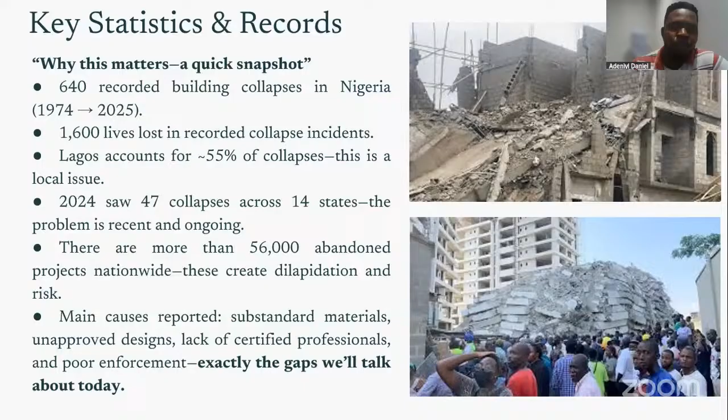What are the main causes of this report? Substandard materials, unapproved design, lack of certified professionals, and poor enforcement. And these are exactly the things that we will be looking at today, the gaps that we will be talking about today, the reasons that cause this collapse, the reasons that make buildings that have been constructed not become as functional as expected.

What is the truth about building? Structural integrity and functional design are often considered the most important factors for a building. Aside structural integrity and functional design, any other factor that is considered for a building is always secondary. First, two things to consider: structural integrity and functional design, as it ensures safe and durable, and serves the intended purpose effectively. Aesthetics, while important, is secondary, just like I have said.

The first stage is the design stage. The design phase is the phase where ideas are transferred from the client to the architect, who then brings the client's ideas to life, and then pushes the design to the structural engineer. The structural engineer does its part, pushes it to the mechanical, electrical, and plumbing engineer. They do their part, and that's the design phase basically.

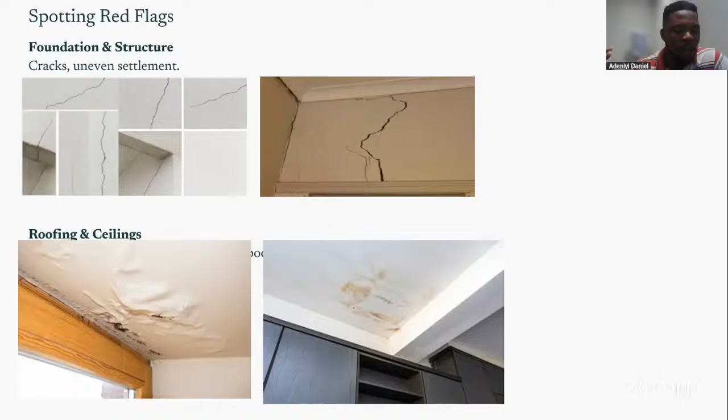You are expected to engage a proper contractor to do your roofing, so that you don't come back and start doing maintenance work for poor work that has already been done. So these are the things that cause leakage from the top, usually when works are not done well. You will spend money in the long run.

Wall finishing: dampness, bulging, and poor plastering. I've already spoken about the effect of poor plastering. But yeah, dampness as well. This is another thing that is seen in a lot of Nigerian homes. Even medically, it has been proven that damp walls affect our health. It causes degradation in our health, right? And there are some of our homes that have damp walls.

What could be the cause of a damp wall? Like I said, water from the top can cause a damp wall. Water from the side can cause a damp wall. Water from the side could be that maybe the earth is resting on that building at the back, and that is what is making that wall damp.

It could be that there is a pipe that runs through that wall, and that pipe was not fixed properly during the construction phase, and it is seeping out water. The water will keep soaking it, and it will cause dampness on the wall. It is easy to attend to a wall that is receiving water from the top or from the side. It is easy to solve that problem.

But there is a third one, water from the bottom. If water is coming from the bottom of a building and is causing dampness of the wall, it's better you either leave that building, or just move. There's almost no solution that you can carry out at that point, because at the foundation level of every structure, you are expected to apply something called DPM, damp-proof membrane.

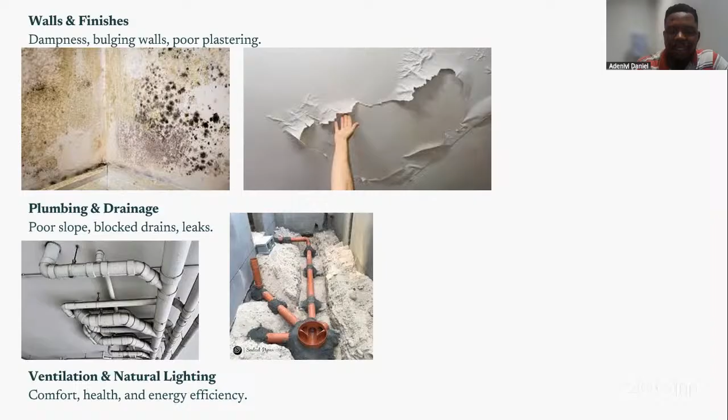Ventilation and natural lighting bring in comfort, health, and energy efficiency. These are also some red flags. You go into some spaces and you would only see maybe one tiny window and there is no cross ventilation. That's a concern. That's a red flag for you to look into, and it's a sign that you shouldn't key into a project. These are just some red flags. We'll still see some other things as we go into this topic.

Like I said, the structural engineer and the builder are the two most important professionals in the construction team. Why is the structural engineer important? I had already established that the structural engineer ensures the project's safety and stability through designs and analysis, applying principles of mathematics and physics to create stable, lasting structures that meet codes and regulations, right?

Also, before the structural engineer does his own part, there is usually a soil investigation done on the site where the building is coming. It is through this soil investigation that the structural engineer will know the type of soil in this particular area. Say you are building on the island, right? The top layers of the soil on the island cannot support a high-rise or a mid-rise structure. That means I have to go all the way down to take my support from lower levels of the soil. We'll see some other pictures of foundations.

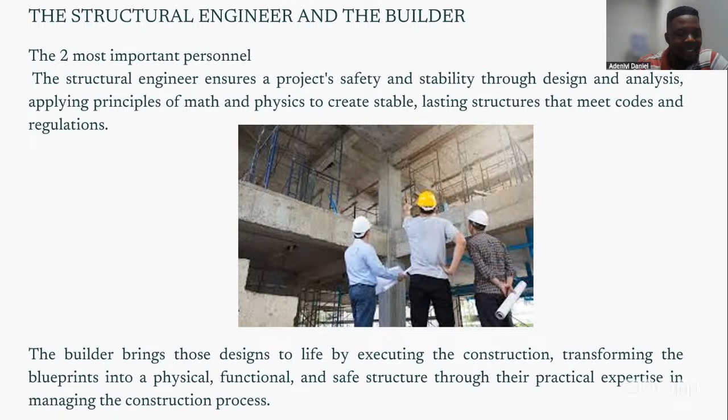After the structural engineer does his drawing, he tells you to use this principle, this grade of concrete, this reinforcement. The builder then follows what the structural engineer has done to ensure that the building is functional, like I have explained. So these two personnel are very, very important. They are the ones that determine if this building will stand, especially when it comes to preventing collapse or structural failure.

I mean, it is the soil that would carry the structure at the end of the day. But based on the load that I am putting on this soil, right, there might be a part of the soil that has low bearing capacity, low bearing density, right? That means I have to go deeper because this foundation cannot go deeper. I have to choose this other foundation. Because this foundation cannot work here, I have to choose this other foundation, right?

I have been opportune to witness all the basic 4 types of foundation, and actually most of the time all these foundations are also used together, right? You can almost not use a pad foundation on its own without involving a strip or a raft at the end of the day. You cannot just use a pile on its own without capping it and then using a raft or a ground beam or a strip at the end of the day. So it is the structural engineer that determines this.

Also, I've already spoken about soil investigation. It is important that soil investigation is done, because it is this information from the soil investigation that the structural engineer would then use to carry out his design, right?

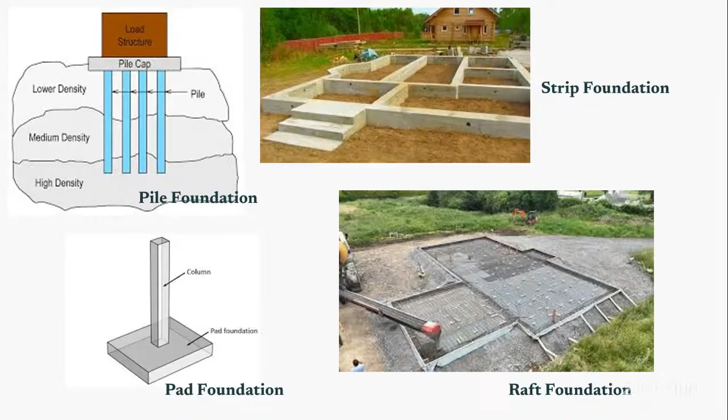There is also a project that I know that is going on at Yaba, right? It's an 8 floor structure, and they are using raft foundation. They don't have to use pile. The structural engineer had all his designs and all of that, and he confirmed that it can happen, and the government approved it. So using the right professional is very important. They can help you save or help you lose, right? It's a two-way thing.

Another thing that the structural engineer determines is also the type of concrete that would be used for that project. We have several types of concrete, right? We have M5 to M80, C5 to C80, and these are grades of concrete basically. Like we can see on this table, we have some that are weak, some that are non-structural, some that are moderate, some that are standard, and then high strength, and we see their use cases, right?

The mix ratio, the information you see there, 1 means bag of cement. The figure in the middle, that's the 5, means sand, right? And the last number there is granite, right? So this mix ratio is what helps us determine the type of concrete that is to be used. And it is the structural engineer that enforces, okay, for your column, use grade 30 of concrete, right?

Now, some contractors want to manage, some of them feel like, why am I using grade 30 for this? And then they try to go against the standard and start using, say, grade 20 where they are supposed to use grade 30. Why? Maybe because they want to manage cement, maybe because they want to steal money. These are the things that affect our structures in the long run.

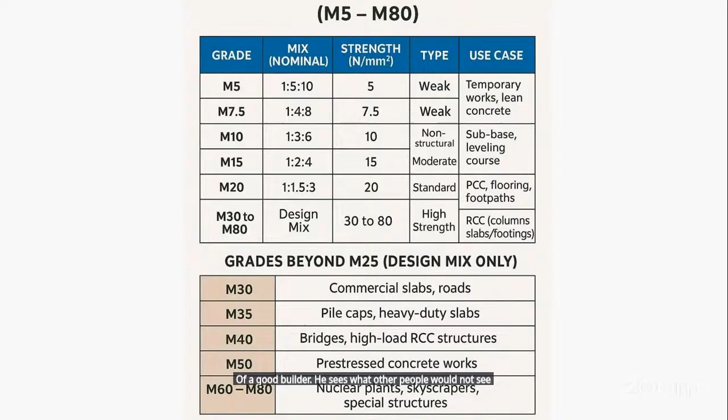When implementing this on site, I feel that your reinforcement detail or this detail that you're giving us would not work here. We need to maybe increase it. We need to add another column. We need to add another beam. That is the importance of a good builder. He sees what other people would not see. You have to look ahead and foresee some things.

Your compound level from your road level is also something that is included in your drawing, right? By the architect, right? But a good builder, when you get to site and you see that the specification that has been put in the drawing by the architect, that you should use a particular level from your road level, doesn't seem to function. If rain falls, if there is a heavy downpour, water would come into my compound.

A good builder would see this beforehand and would flag it to the architect or would flag it to the structural engineer, like, we need to increase our compound level, we need to increase our ground floor level so as to prevent water from getting into our compound. That is what a good builder would do, right?

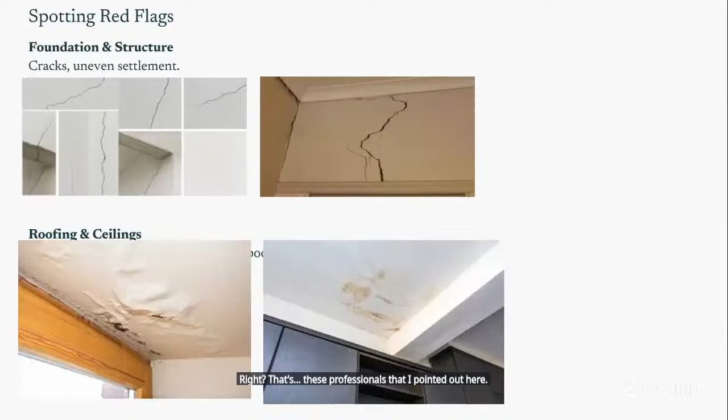So it is either the project has gone against a standard, or they've not done what they are supposed to do, or the building is already failing. Then they will mark it as distressed and they will come and demolish the building. It is LASBCA that does this, right? And the good thing about LASBCA now, especially recently, there's been a change in the state of affairs of LASBCA. There is now a LASBCA compliance form that all these professionals that I pointed out here must sign before any stage of your construction can go on, right?

So your consultant architect, I say consultant because it must be a consultant registered architect, consultant structural engineer, consultant mechanical engineer, consultant electrical engineer, must sign off this form before you carry out that phase of your project.

Every stage, for every stage, the consultant must come and give sign off. This was put into place because in recent building collapses in Lagos, it was noticed that after buildings collapse, professionals or engineers or consultants who had been engaged have the tendency to deny involvement, saying they weren't carried along when that stage was being done or when that decision was being made.

So this compliance form shows that you signed off that the fifth floor slab should be cast, that the seventh floor column should be cast, for every stage. It keeps everybody in check, because you don't want your name tainted or your certificate and seal withdrawn from you. You have to come to site as a consultant and check that the right thing is being done, which is a very good step from the Lagos State government.

Another agency is the Lagos State Material Testing Laboratory. It ensures construction safety and quality in Lagos by testing and certifying building materials like concrete, reinforcement, and water to standard, to prevent collapse. Just as LASBCA gives sign off for every stage, Material Testing Laboratory also expects you to bring a sample of your concrete at every stage to their laboratory for testing, to confirm that your concrete, reinforcement, and water are to the right standard, with results for each test.

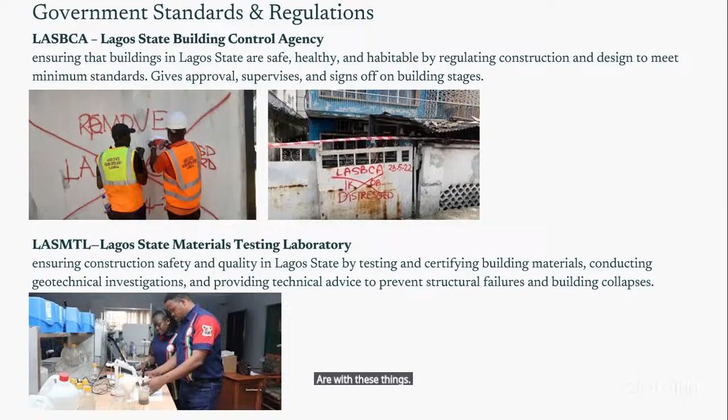Another government agency is the Lagos State Physical Planning Authority. These ones ensure that your structure or building aligns with the physical planning of Lagos State, so they are also very, very important. Also, there is the Federal Fire Service approval. You must get this permit and certificate before you start any work or construction in Lagos State now. If not, they will come and keep disturbing you.

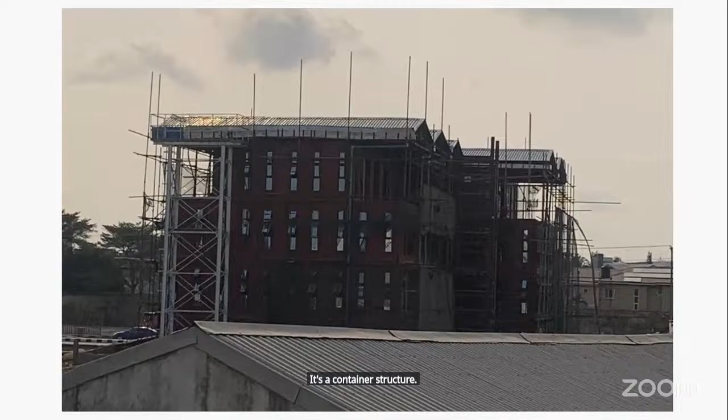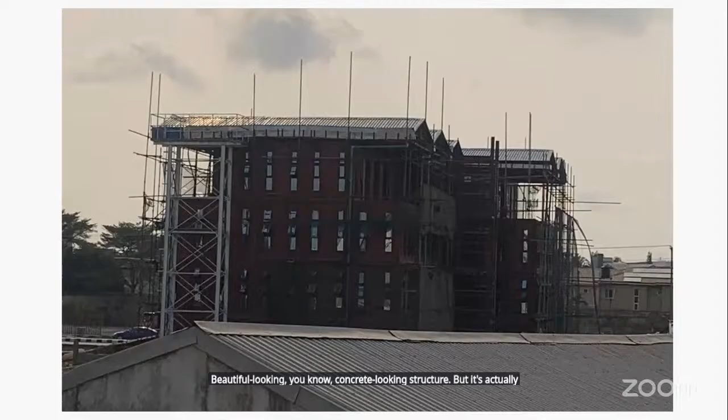Now let's look at this structure. If you look at it, the first thing you see is, wow, a very beautiful, well put together structure, three floors, and you'll think, okay, blocks and bricks. But no, this structure is not block and brick, it's not concrete at all. It's a container structure. This is a perfect example of what facade cosmetics, like I said in the first slide, can do. When you see this, you'd think it's a beautiful looking, concrete looking structure, but it's actually a container structure.

This construction has been going on behind our site since we started our project here. And since this container structure started, none of the agencies I just mentioned, LASBCA, Material Testing, Physical Planning, has come to either seal up their site, put a stop work order, or put a red mark in front of their gates.

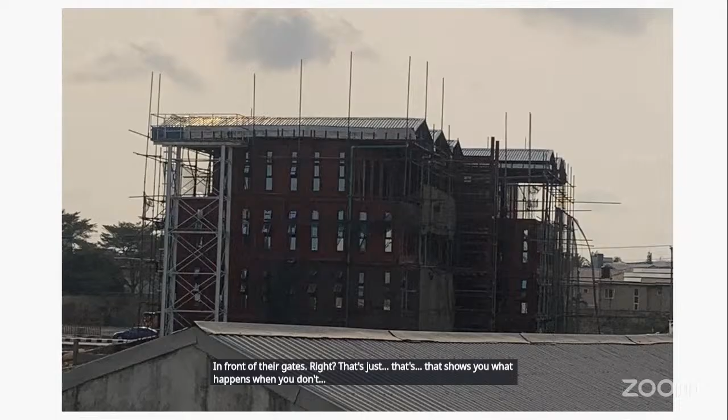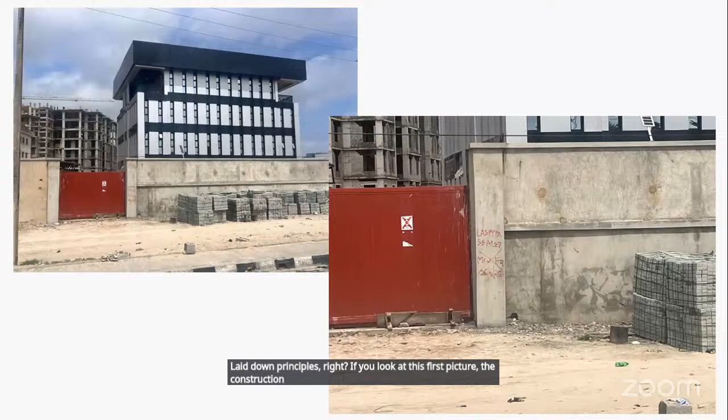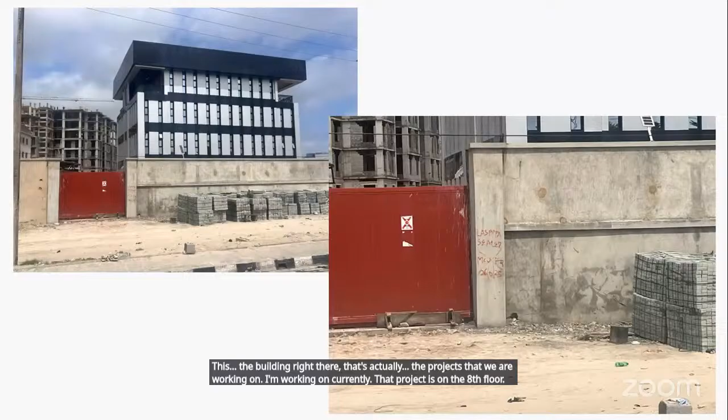That shows you what happens when you don't follow the right laid down principles, right? If you look at this first picture, the construction going on right behind the building right there, that's actually the project I'm working on currently. That project is on the 8th floor. And before we even left the foundation, this container had already been standing, right?

But till today, this project, if you look at the gate here, it says sealed, right? There is a seal, there is a stop work order that has been put on this project for months now. That is what happens when you don't follow principles. It delays work, right? It causes delay in the long run, extra money that you didn't plan to spend. That's what happens when you don't follow the laid down principle.

Also, some months ago on the street where I live, buildings that have already been occupied for more than 3 years, LASBCA came and marked these buildings as sealed, put caution tape on these buildings. Just on my street, 1, 2, 3, 4 buildings were marked as sealed, right? This was probably the effect of a contractor not doing the right thing, not carrying the government along, or not sticking to the right principle, following the right code, when they were constructing.

And this is what happens when we engage people that we are not supposed to engage on our project, or we move into places that we are not supposed to move into without doing due diligence. Before you move into anywhere, before you rent a space, ask the right questions. Did this building follow the right code or standard? Was this building built in line with the Lagos State government policy? Ask these questions, because without asking them, there is a problem coming later in the future.